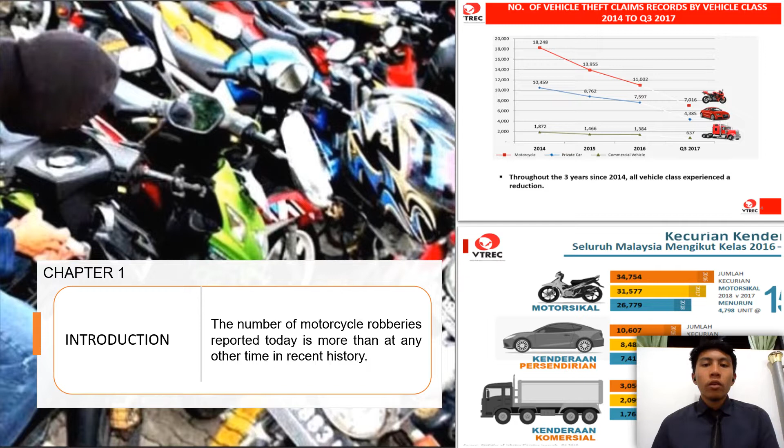Chapter 1. Introduction. The number of motorcycle robberies reported today is more than at any other time in recent history. Motorcycles contribute significantly to the industry. Motorcycles are also widely used as a mode of transportation. Furthermore, statistics about the stolen motorcycle problem in Malaysia show it is not under control, even though the number of motorcycle thefts is falling year by year. Motorcycle theft continues to account for the majority of instances across all vehicle categories.

Next slide. Problem statement. The theft of motorcycles is becoming more common these days. In 2017, police received 31,577 reports of stolen motorbikes. That's an average of 87 bikes stolen every day in Malaysia. Motorcycle theft is common because there are not enough security locks for motorcycles that provide adequate protection. Thus, a high-security lock for motorcycles was designed.

As a result, it's tough to locate the finest motorcycle lock on the market with great security, which is one of the main reasons why motorcycles are still simple to steal. That is why my project is to come up with a solution to this problem. To assure people or customers that their motorcycle is not easily stolen, the anti-theft lock system must be of high performance and security. Next slide.

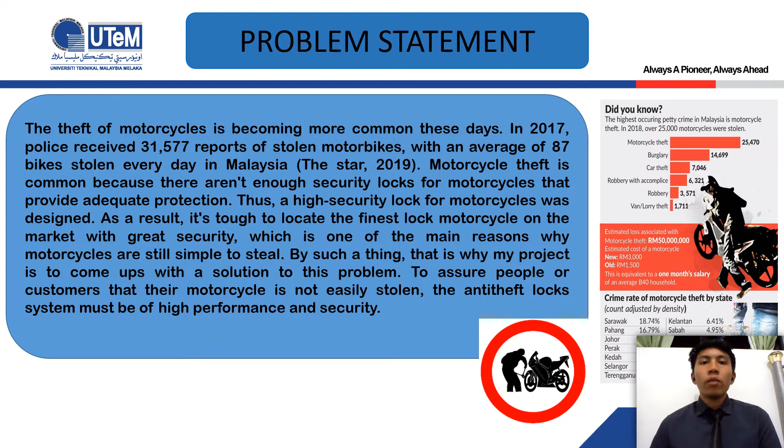For the common problems, first is easy to steal. Motorcycle theft is a crime on the rise, especially the theft of motorcycles that don't have high safety, due to the fact they can be stolen in seconds. Second, lack of safety. A handle lock is very easy to defeat. Thieves just need to kick the bars and it breaks. A typical technique, especially in a busy city, is to snap the steering lock, then push the motorcycle away.

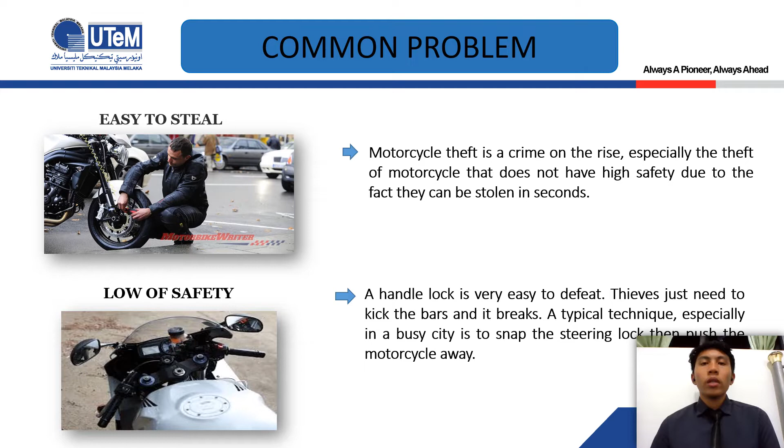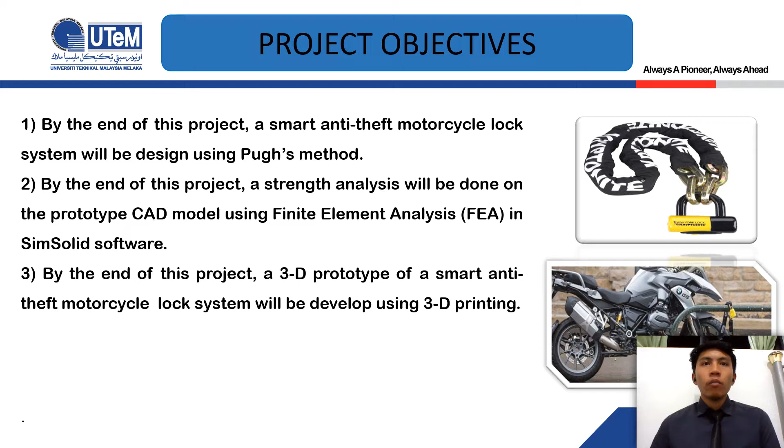Next slide. For my project objectives, first, by the end of this project, a smart anti-theft motorcycle lock system will be designed using Pugh's method. Second, a strength analysis will be done on the prototype CAD model using finite element analysis in SimSolid software. Third, a 3D prototype of a smart anti-theft motorcycle lock system will be developed using 3D printing. Next slide.

Chapter 2, Literature Review. A review of literature relevant to the present study, comprising types of lock systems in the market, to conduct the development of the best locking system that connects the front and rear tires. Inspiration came from the frame lock used to lock bicycle tires. The type of lock is a frame lock and the material used is steel. For the pros, first, lightweight and easy to use to safeguard your bike against unauthorized users. Then, relatively light and has a stiff shape. For the cons, depending on their size and flexibility, they might be difficult to loop around non-standard or large objects.

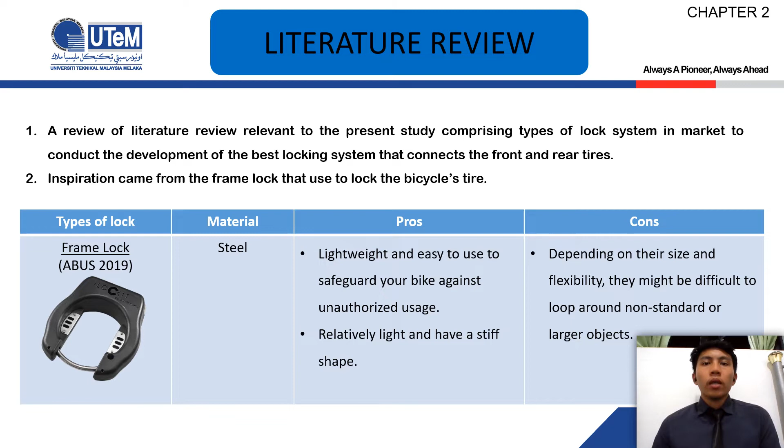Next slide. Chapter 3. Methodologies. The flowchart on the right-hand side shows the graphical presentation of the methodology for this project. The methodology discusses the process of development of the anti-theft lock system for motorcycles. Firstly, the focus of this project was on gathering as much design input from various sources, then doing some research about the design that will solve this problem statement.

Next, the process is continued with doing the design by using Autodesk SolidWorks 2019 software. Then, the design must use finite element analysis to find and see the strength of the body of the anti-theft lock for motorcycles. Lastly, the process of developing the 3D prototype will proceed with suitable material using a 3D printer.

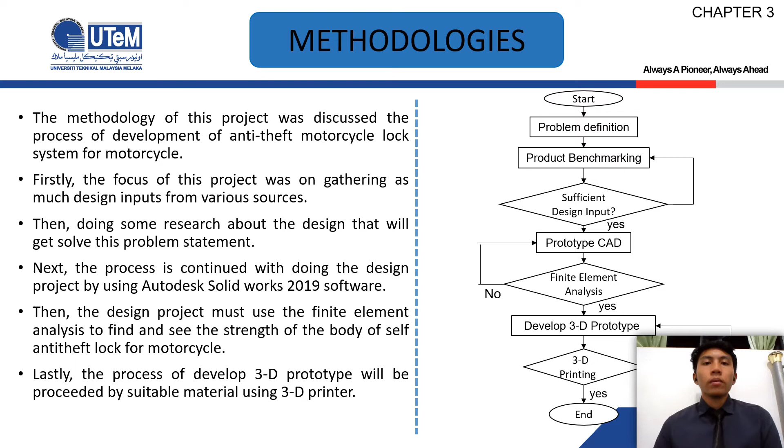Next slide. Chapter 4. Prototype development process. The design concepts generated at the concept design stage will go to the concept evaluation stage to evaluate and choose the most suitable design to develop the new prototype. To choose the perfect design, three design concepts have been created and researched by using Pugh's method. The evaluation criteria consist of security level, ease of application, complexity, strength, weight, durability, and installation time.

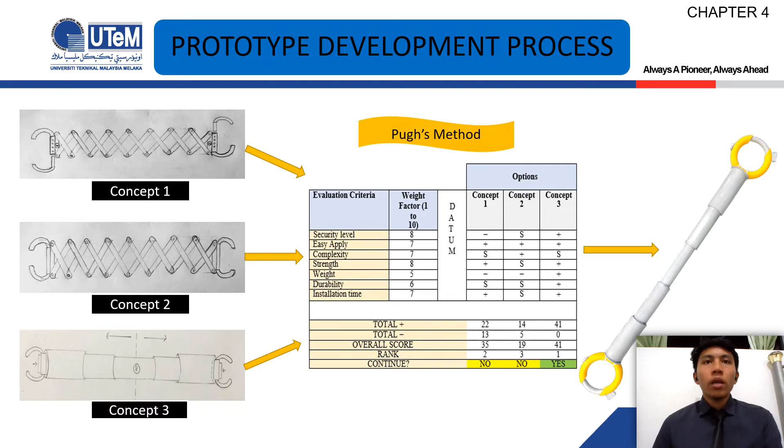Next slide. Design process. The CAD model for the ATLS product consists of the body rod for the ATLS and the tire lock for the front and rear tire. The figure shows the 3D design of the body part that was drawn in SolidWorks 2019 software. The rod body for the ATLS takes inspiration from a few available designs discovered through a literature review and market survey.

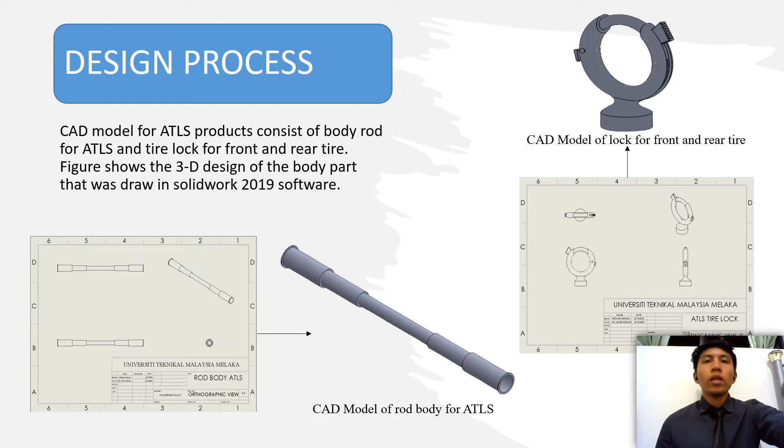And for the lock for the front and rear tire, the 3D model was developed according to the actual function of the frame lock as shown in the literature review as the benchmark used in this project. However, certain adjustments were performed using different dimensions and parameters in accordance with the tire size guidelines for motorcycles with low side. Next slide.

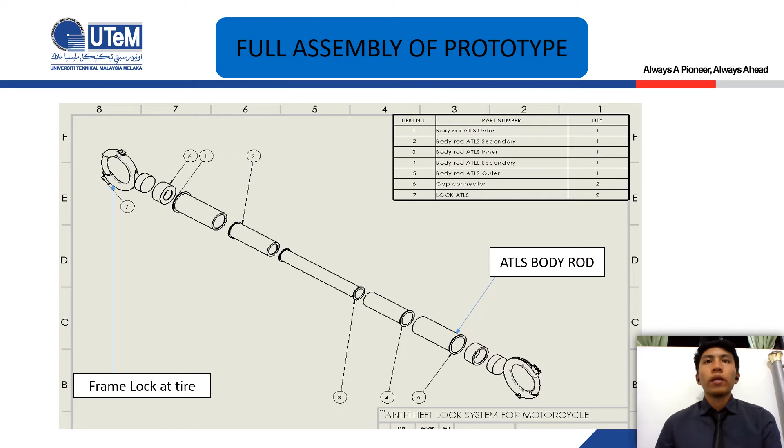Next slide. For the finite element analysis process, the design analysis will be applied to the CAD model to see the strength of the ATLS body rod using SimSolid simulation software, and the results were displayed in terms of maximum displacement magnitude, maximum von Mises stress, and minimum safety factor. If viewed from the side, the rod body is supported at one end, which will hit the motorcycle engine cover, and at the joint between the tire lock and the tire rim was given the force of the moment that brings the motorcycle forward.

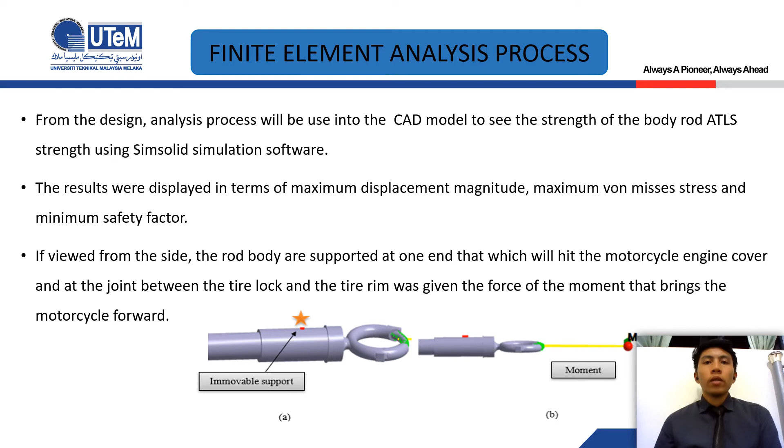Next slide. The resulting maximum von Mises stress experienced by the body rod of the ATLS was 1.1575 × 10^6 Pascal, located on the part that is stuck to the engine cover. Second, in terms of maximum displacement magnitude, the ATLS body rod experienced a maximum displacement of 2.2488 mm. The maximum displacement occurred at the rear end of the ATLS tire lock.

As for the minimum safety factor, the minimum safety factor experienced by the ATLS body rod was analyzed to be 2.2615. A factor of safety greater than 2 represents how much the stress is within the allowable limit.

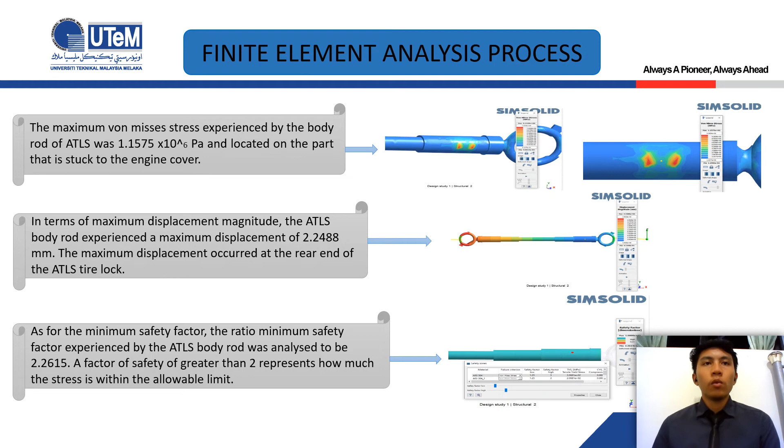Next slide. For the developed 3D prototype, the figure shows the isometric projection of the 3D prototype of a smart anti-theft motorcycle lock system that was developed using 3D printing. The top view is top left, front view bottom left, side view bottom right, and the isometric view top right. Next slide.

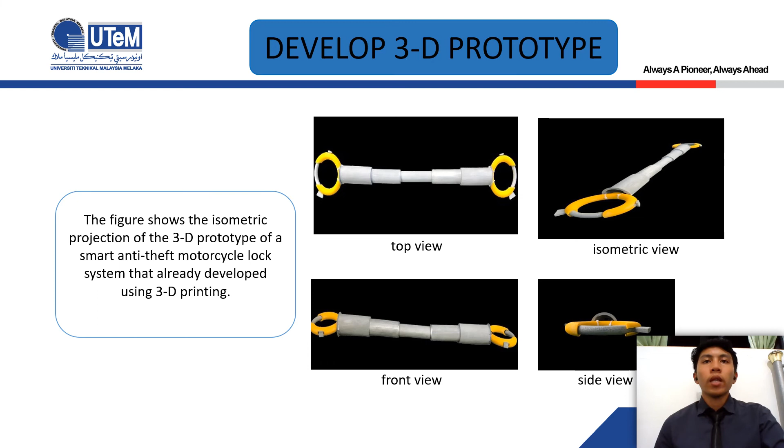Chapter 5. Conclusion. For the first objective, by the end of this project, a smart anti-theft motorcycle lock system will be designed using Pugh's method. As a result, the prototype development approach used in this project resulted in a well-functioning prototype that met all the project's requirements.

The second objective: by the end of this project, a strength analysis will be done on the prototype CAD model using finite element analysis in SimSolid software. The project discovered that the application of an appropriate finite element method for the body rod of the ATLS has proven that it can provide a high security system for motorcycles, provided that the prototype dimensions and materials are appropriate.

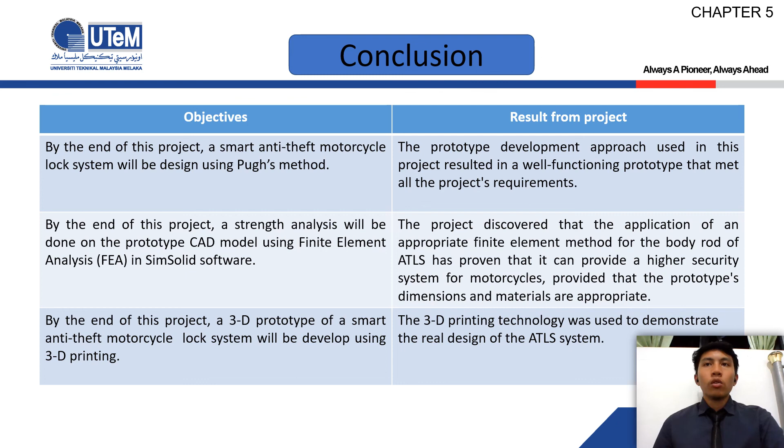For the last objective, by the end of this project, a 3D prototype of a smart anti-theft motorcycle lock system will be developed using 3D printing. The result is that 3D printing technology was used to demonstrate the real design of the ATLS system. Next slide.